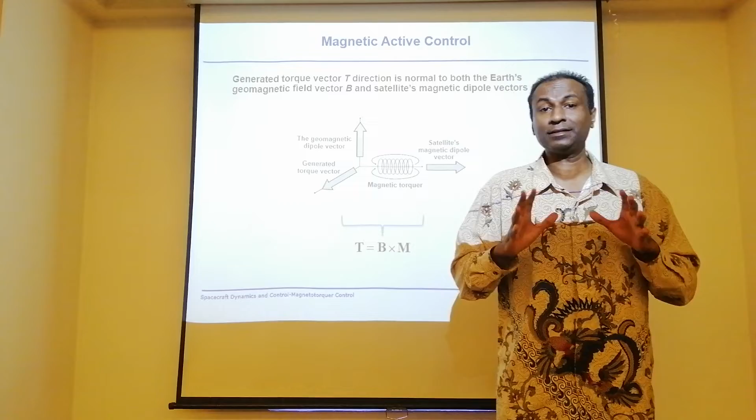So first of course is aerodynamics. Second is gravity gradient. Then you have the Earth magnetic field disturbing the satellite, and the fourth will be solar radiation, which also disturbs the satellite in terms of its attitude. So we know for a fact that the Earth magnetic field is indeed disturbing the satellite. Now let us think how we are going to use this particular field to benefit us.

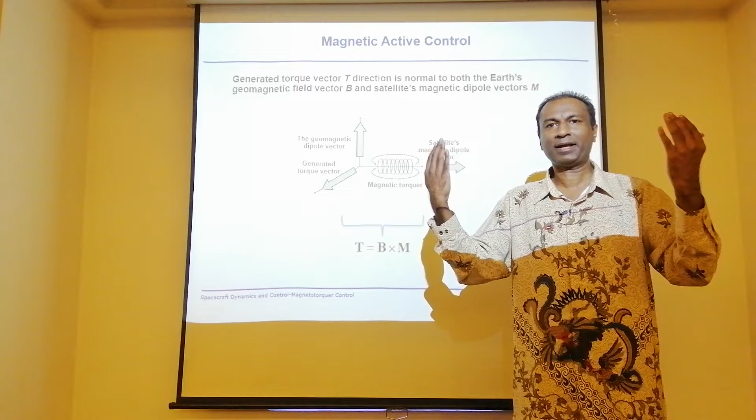If you can imagine, we know that planet Earth has a magnetic field. Assuming you bring another magnet into that field, both fields will be reacting. When both fields are reacting, obviously the smaller object might be subjected to the reaction. So you can imagine two permanent magnets we put together; there will be some forces generated between them.

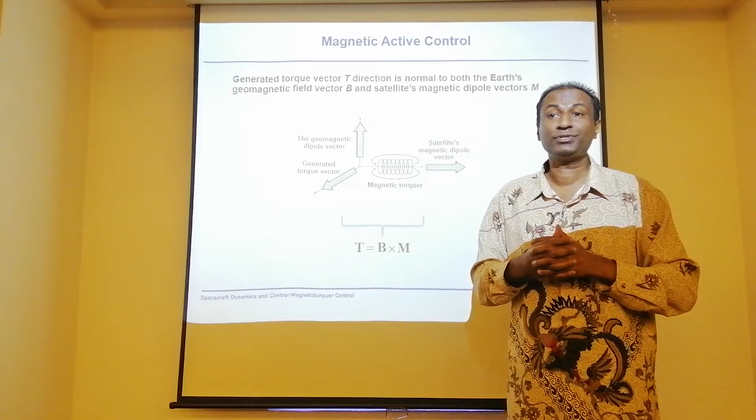So if we can cleverly understand the nature of this particular Earth magnetic field, we can start inducing a sort of electromagnet in order to react with the Earth magnetic field, such that we can induce a particular torque. So the basics are always very clear. You have 3 components involved in order for you to have an active magnetic torque.

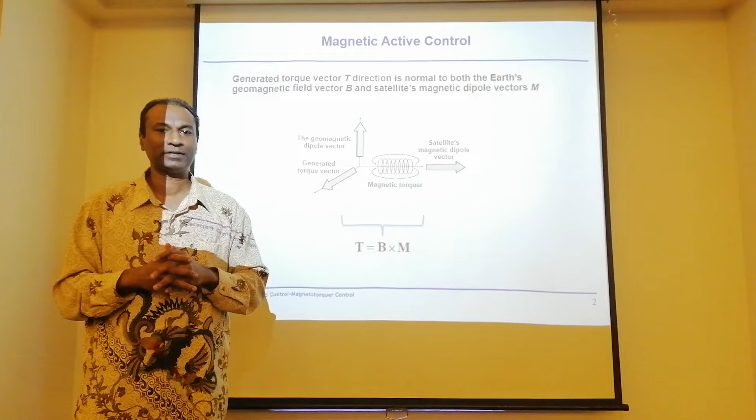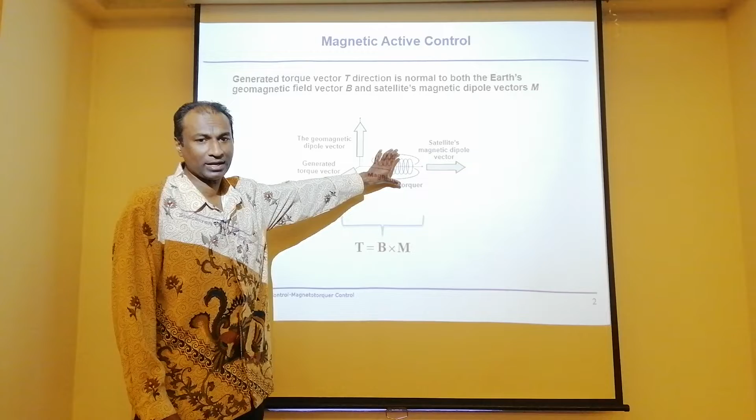Now, first, just imagine that you have a satellite, and inside this particular satellite, you have an electromagnet. You know how we make an electromagnet. When it's on, it becomes, well, a magnet. If you don't have electricity, then it just has cables inside, so to say.

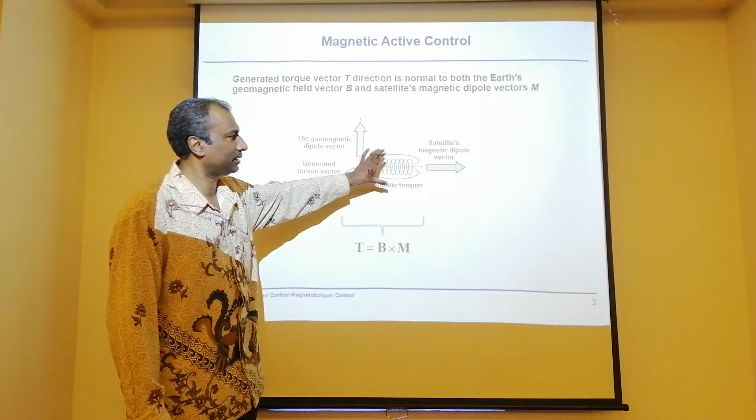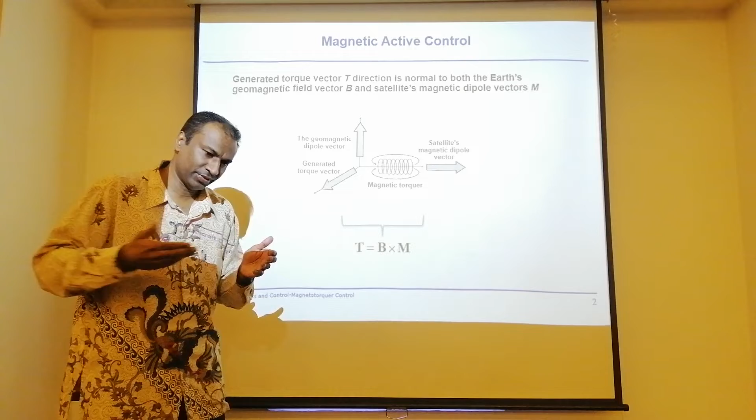Assume that I'm going to inject some amount of electricity into a coil. Automatically, my magnetic dipole vector will be there in this particular rigid body, which is the satellite. So you assume that in a rigid body, in a satellite, I inject electricity, then I will have an electromagnet.

Now, if you look at the design of magnetorquers, it also comes with both. That means there's a design whereby you have a permanent magnet together with the coils. So you have a biased magnetic field, and then on top of it you add, with respect to the current that you inject, a bit more magnetic strength.

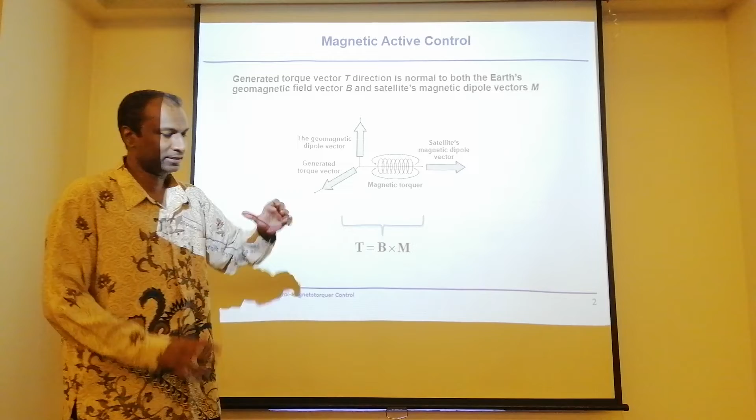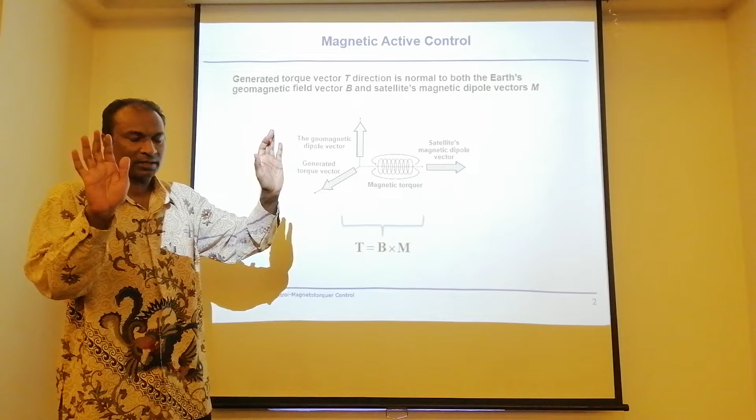So having that, you are creating a magnetic dipole in that satellite. Now, this magnetic dipole is going to react with the geomagnetic dipole vector for sure. So you have two fields already. So technically, when you have these two fields, you are actually going to generate a torque. That's the fundamental. So if you look at the amount of torque generated within this body, assume this is a satellite, assume this is planet Earth, the amount of torque generated because of these two magnetic fields

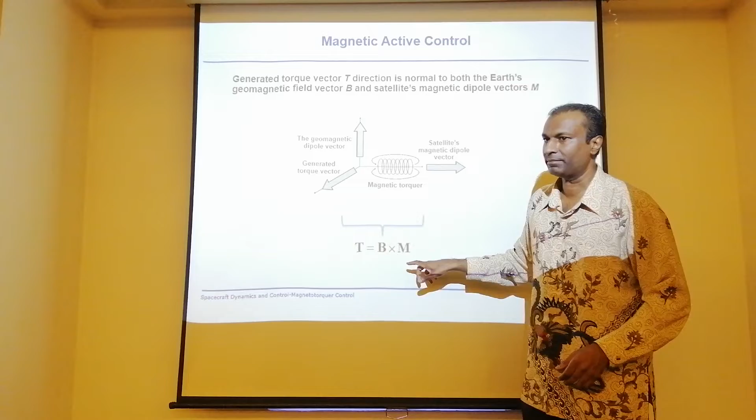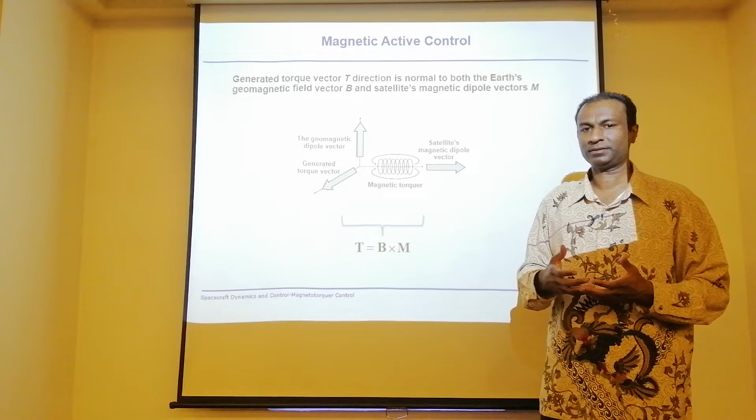is basically nothing but B cross M. And my B is basically my geomagnetic field vector, B, and my M would be my satellite magnetic dipole, which has been generated because of that electromagnet. So you can always use a right-hand rule. So you have the dipole, then you have the torque generated here. So attention, this is actually a vector. It's a cross product, this is the vector.

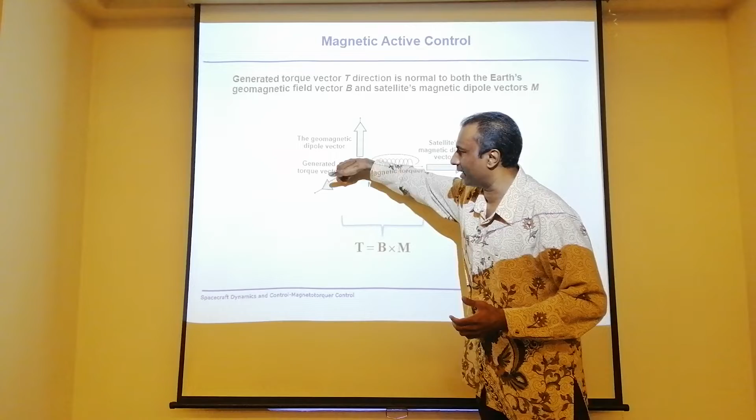So it's a vector direction, but the actual motion of this particular vector is this way. That means it's creating a rotation, but this is just a vector. Okay, so you know the satellite will be actually turned or rotated. The rotational motion happens in this direction along this particular axis. So this is a positive direction of this particular vector, I mean the torque vector.

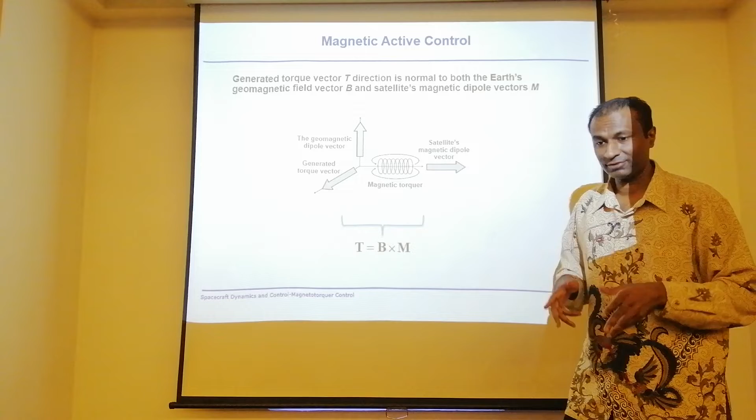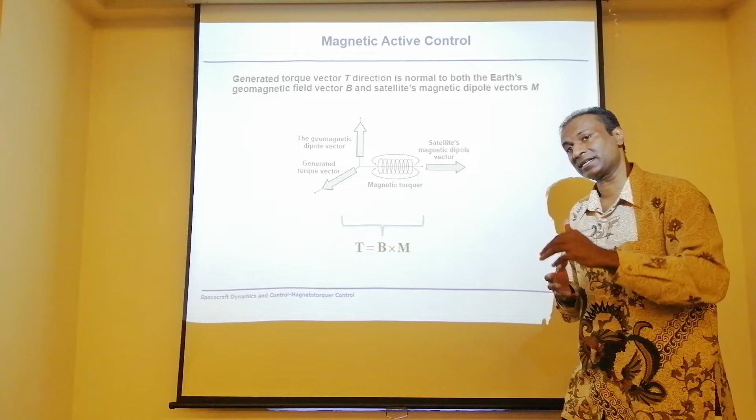Okay, so basically, in order for me to have a torque, I need a permanent magnet or an electromagnet within my satellite. When I fly a satellite, it's going to react with the Earth magnetic field, and therefore I can actually end up inducing a torque. And this torque, if I can cleverly do that, I can actually reduce the disturbance that we have always talked about. We can in fact nullify those kinds of disturbance. But again, let us see later how effective that is.

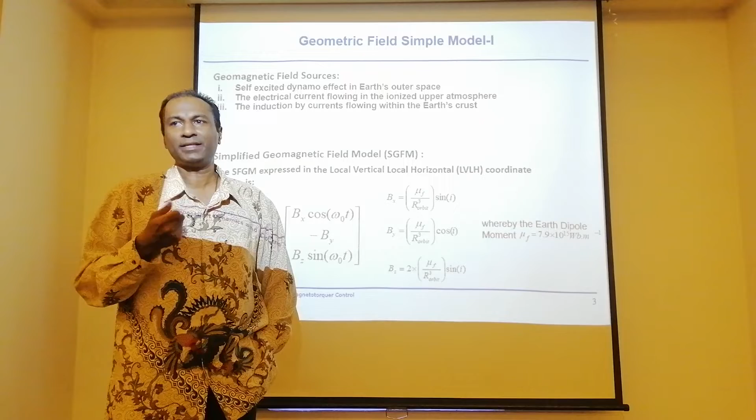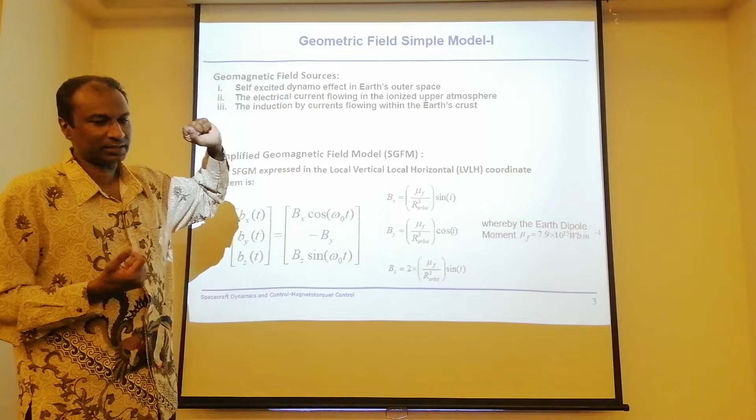Now, in order for us to precisely control the satellite, we must know the source of your geomagnetic field. Now, for the satellite itself, it's not a problem because of the magnetorquers that we can design, and we know what is the performance of this particular device. But then we also must know what is the magnet outside of the satellite, which is the Earth magnetic field. So therefore, first of all, there are basically two models. I'm going to introduce to you the simple model.

The estimation of the external disturbances. One of the external disturbances was basically the magnetic disturbance of the planet Earth, right? That is being calculated using a simple model. So again, I re-invoke the simple model. This formulation you have seen before in order for you to calculate your external attitude disturbance for the particular satellite. And basically you have X, Y, Z.

Now, if you look at it, the geomagnetic field is basically like a dynamo effect in Earth. I think this is basic physics that we have learned, how planet Earth has its own field. Current flows, it also ionizes the upper atmosphere. Then basically the induction, but the current is actually flowing within the Earth crust. This is very basically how the whole field is created.

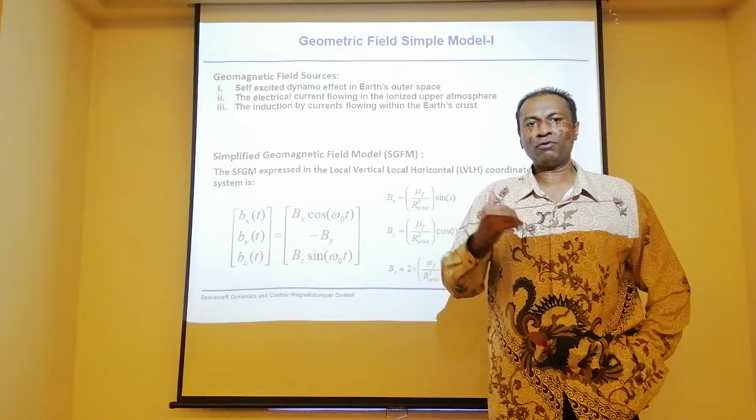Now, more importantly, please do understand that we have been using the simplified model for your estimation of external disturbance torque. And we are going to use the same simplified model to estimate the actual magnetic fields along your three axes, that means X, Y, Z. So this is basically with respect to the local horizontal system that you have. All right, now, talking about that simplified model, you may want a bit more precise model.

Remember, if we start measuring the magnetic field precisely, we can also find the attitude of the satellite. That means we can actually navigate using it. Not only are we using it to control; first, what we are trying to do is use it as another magnet, and use our magnet within the spacecraft to control it, because both will react and produce torque.

But if we measure the actual magnetic field of the planet Earth, and we know exactly the strength at any altitude, any distance, then we should be able to tell you exactly where you are in terms of your attitude. So in a nutshell, please do understand, this Earth magnetic field does three things to the satellite. It can be a disturbance. In fact, it is a disturbance for low Earth orbit satellites.

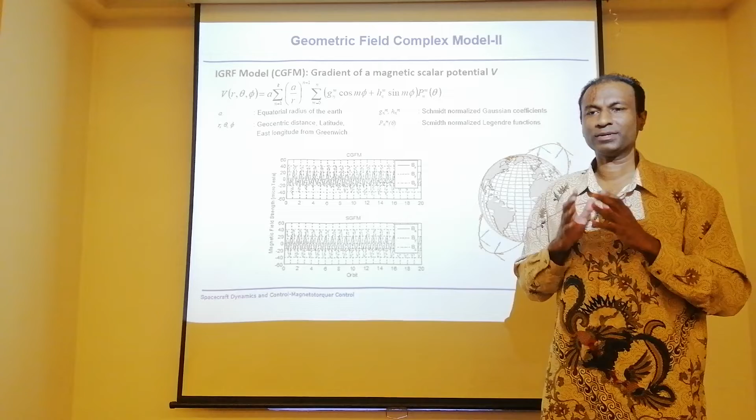In order for you to do attitude determination, you can't use a simple model. You must have a complex model to do the estimation. So there are two models actually. Typically we use the IGRF model, International Geomagnetic Reference Field, the first one. The second one is the Complex Geomagnetic Field Model. There are two models, but they are quite similar.

What this model says is a huge formulation. It looks very simple, but there are so many other processes that you need to go through. The gradient of the magnetic scalar potential V is defined by these functions. So you have a Schmidt function with the Gaussian coefficients. You have the Schmidt normalized Legendre function, and with respect to the actual altitude, in fact radius, from one place to another place.

That is the difference compared to your simplified model. The simplified model gives you an average. That's a simplified model. But a complex model will give you differences at practically every altitude. The differences might not be so huge, but they are very important when you do attitude estimation, in fact, attitude determination.

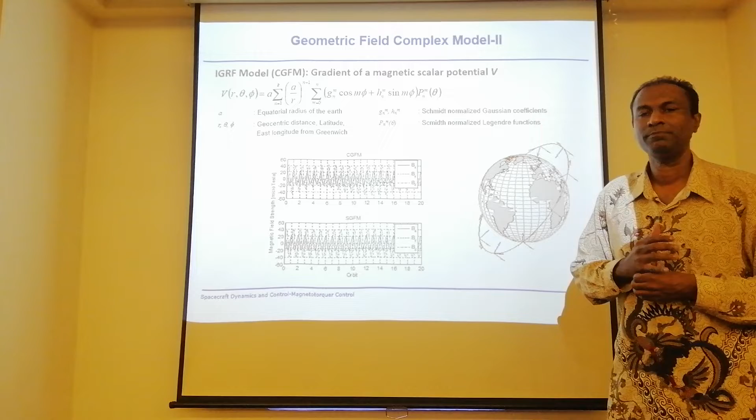So from now onwards, you know that two models are there. Since we are going to do attitude control, we can pick the simplified model to do the attitude control. The first one is B-dot magnetic control. B-dot magnetic control is one of the simplest ways that you can control the satellite, with the use of electricity, in fact, your current.

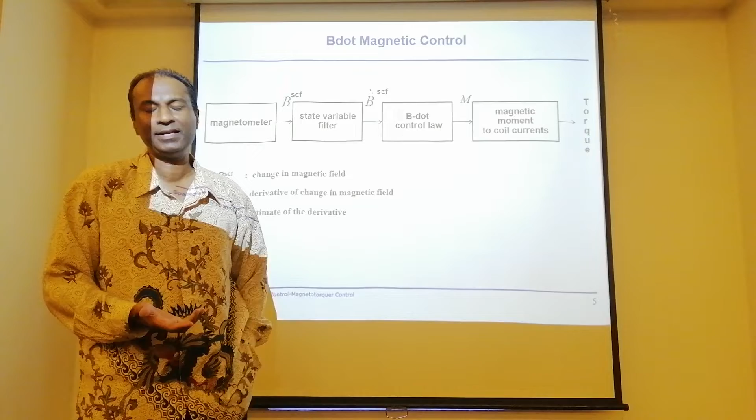What it does is that you switch on the magnetorquers and leave them on, and they keep producing torque, hoping that you can reduce the attitude error in coming orbits. It goes on until you have the error minimized as much as possible. Sometimes it doesn't go to zero, because external disturbances are still disturbing you constantly. So you will never hit a zero point with B-dot pointing.

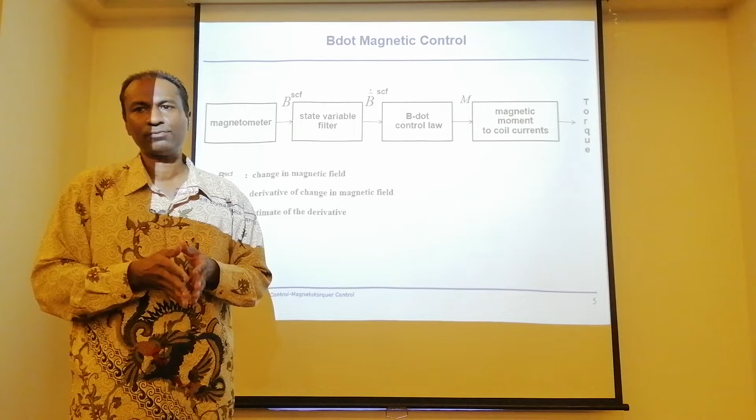Why is it called B-dot pointing? Because you are trying to find the derivative, or rather the difference between the magnetic field at time 0 and time 1. So the derivative of the magnetic field, that means the evolution of the magnetic field. What it does is this.

The simple process. Magnetometers, which I think you have done in your satellite lab, can measure the strength of the magnetic field. Once you can measure it, you know the change in the field. It's very simple. So two different devices. Magnetometers measure. Magnetorquers are basically nothing but an electromagnet, or a magnet plus an electromagnet.

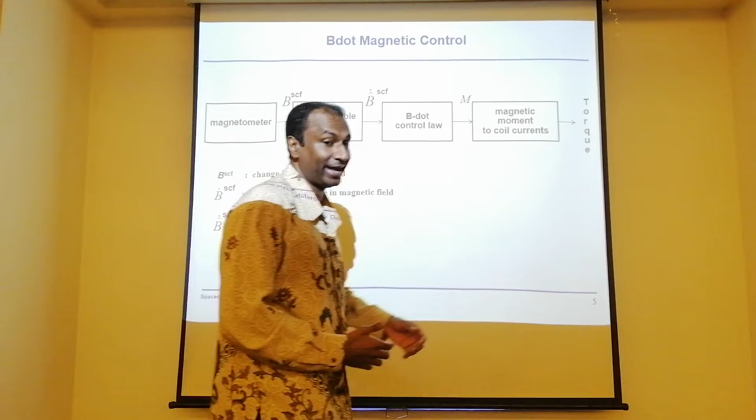Then you have a state variable filter. This is a bit complex, but why do we need this filter? Filter means it tells you exactly what the variation is, and after measuring, you need to compare with your previous measurement, so we say you're doing a filtering process. In fact, you're doing an estimation process in order to determine the derivative, or change, in the magnetic field.

So there's a process for you to do, because you have few readings. Remember when you switch on the magnetometers, let's say your orbit is about 90 minutes and you have readings for 90 minutes, you've got to keep on updating. So there is a huge amount of readings. We are just talking about only one axis here as an example, but remember you have 3 axes.

So with magnetometers, let's say you have all 3 axes, so you have 3 different readings, and every second, let's say, there is a change. When there is a change every second, you will have a huge amount of data within about 90 minutes. Therefore, you've got to keep on having a filtration process. What is a filter? Estimation. You have a process, you have an algorithm.

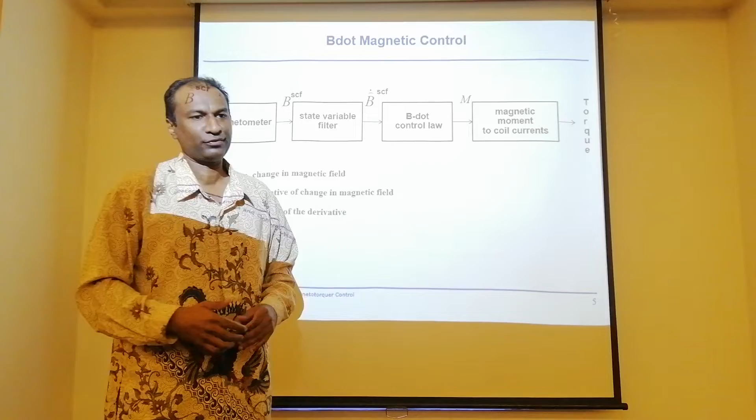But we won't cover this much because this is already in advanced courses. Filter design, for example, people talk about the Kalman filter, unscented Kalman filter, etc. All those are in advanced courses, in fact, a master's program or PhD program. But here, this is just an estimator which estimates the actual change. Once the change is detected here, practically the estimation will be given.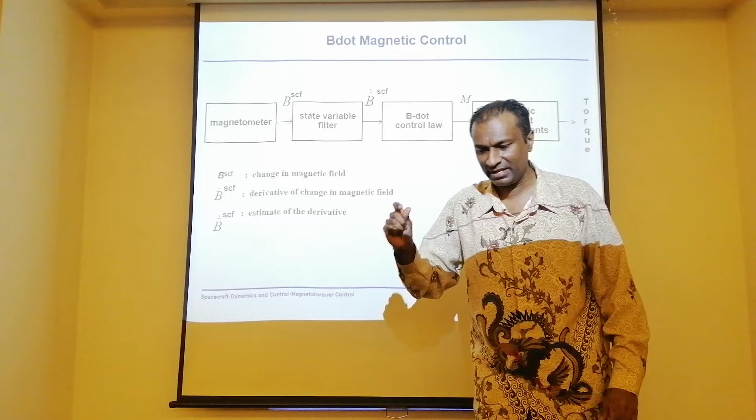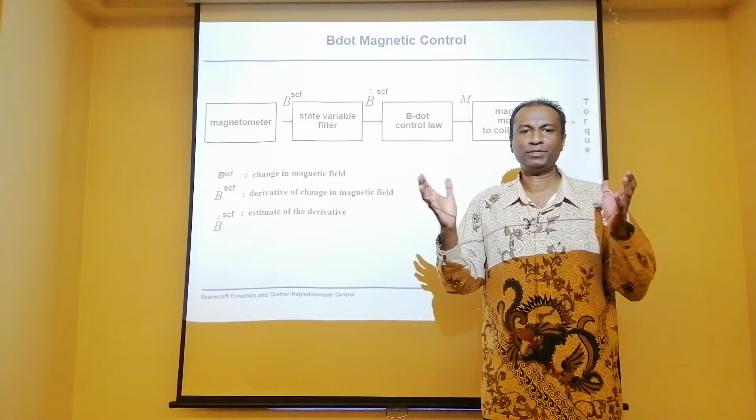The real attitude means what? The best is that roll is 0, yaw is 0, and pitch is also 0. All those have to be 0 attitude. Then you are perfect, that means perfect pointing. But never. So what exactly will you command? The B dot. Commanding the B dot means you will command the actual differences of the field. That is the simple reason why it is called B dot pointing. And it goes on just like that.

So the command law is done, B dot is given, then the coil reads that: I need to produce this much of a B field, a dipole. It commands, meaning electricity comes and energizes the magnetorquer, then you produce the dipole. Therefore, torque will be produced. Remember, a magnetic dipole from the satellite with the external field produces a torque on the body.

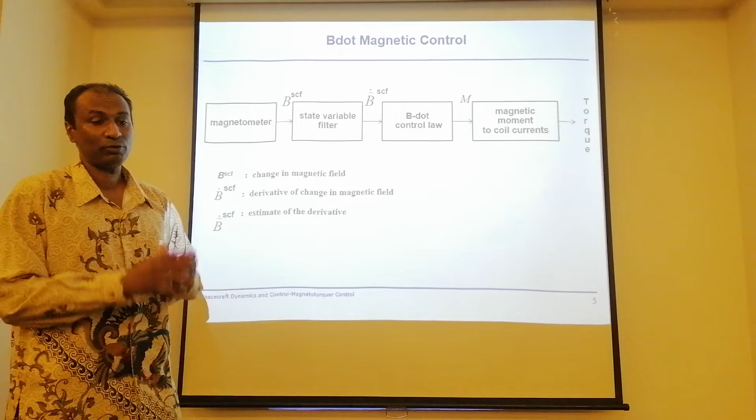This goes on. If you look at it, it's almost like an open loop system. The command is just based on whatever you measure indirectly, and then you start commanding. You can assume it's an open loop command, or rather an open loop system, and you keep on commanding, hoping you can reduce the B dot. When the B dot is 0, you don't need any magnetic dipole from the satellite. That means you already have perfect pointing. But it is very difficult to achieve that. That is the reason you keep on commanding.

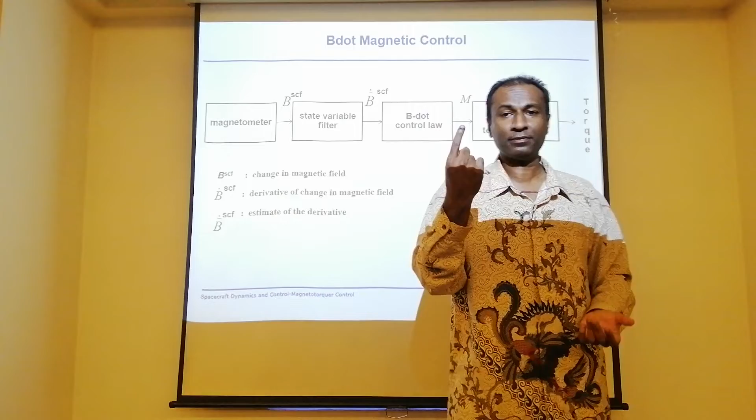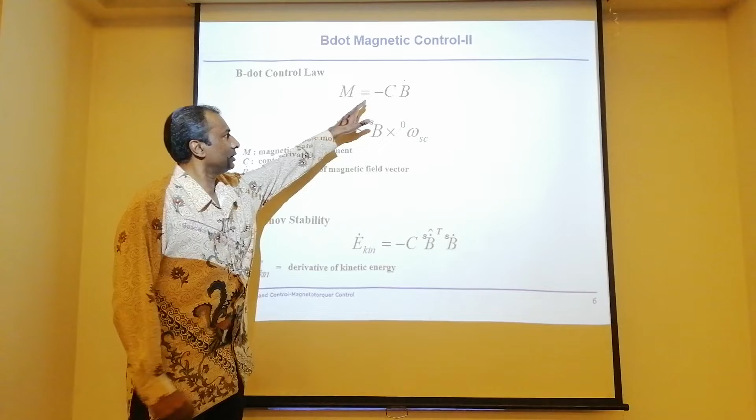So if you have one magnetometer along one axis, you can use this algorithm to command that particular axis. If you have 3 axes, you can have 3 B dot commands commanding the whole system. Moving on. The command is simple, the B dot control command. This is what is given to you, and this is the actual magnetic moment that you need to have. You have to have a C.

C is basically the control gain, and we should be able to start tuning this control gain based on the exact B field that you have. This is a bit of analysis that we need to do so that we can choose the right gain. So it's a very simple, straightforward commanding process. It's not complicated at all. B dot pointing, or B dot commanding, is one of those very basic, very simple ways to control the satellite.

Therefore, if you look at the exact command, this is why B dot happens, because there is a change in the spacecraft. That means there's a change in the exact motion of the spacecraft. When this is 0, you don't need any B dot. But when you have omega, the angular rotation of all these axes, that means there is an attitude error, then you will end up having a B dot. So once it's estimated, you inject it into the command, then you have the control system, which is producing the torque.

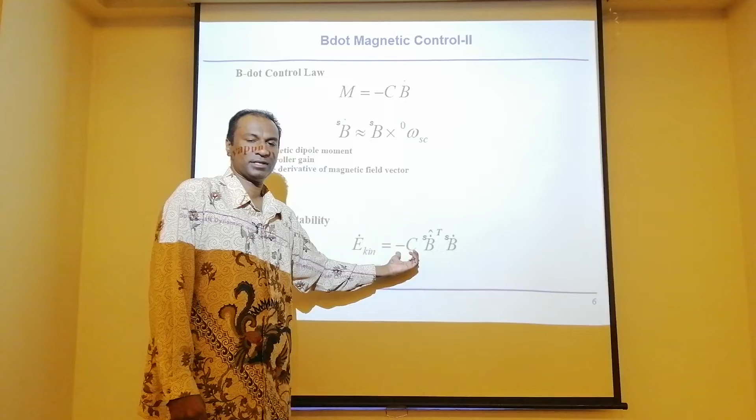Now, in order for us to calculate the control gain, the constant, it's a very simple way. We have these two values already, estimate and then B dot, and this is C basically that I've said. There should not be any derivatives in the kinetic energy. When there are no derivatives in the kinetic energy, the kinetic energy derivative is almost 0. When it goes to 0, practically it says that there is no change in the motion of the spacecraft.

So when you do this analysis, you will start adjusting this control gain in order to get a very stable condition. Almost 0, we can't say exactly 0, almost 0 when there is no change. That means your desire is that there won't be any kinetic energy build-up. It should be constant. When it is constant, practically your motion is very constant.

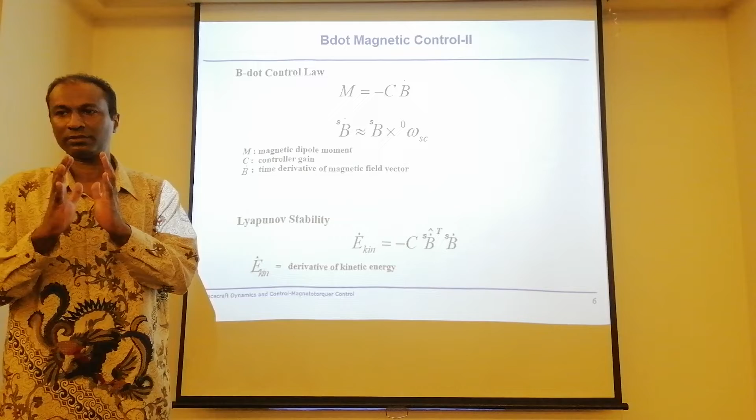So it's a simple stability, Lyapunov stability. In control engineering, you might have been exposed to root locus, etc., and Bode analysis that you have done. But another way, Lyapunov, is also quite commonly done.

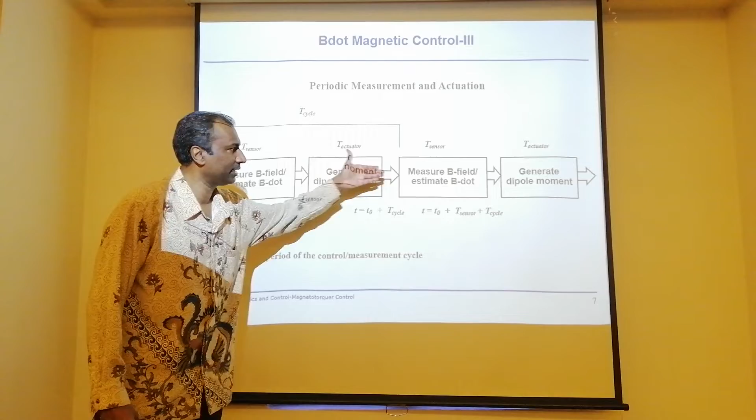Alright, now if you look at B dot magnetic control, it is just like what I've explained just now. It is a constant pointing, a constant torquing, so to say. So what exactly happens? This is considered one cycle. I sense, I generate dipole, I have torque. I sense, I have B dot, then I can have the control torque, or generate dipole, then I can have the control. So this is measure, control, measure, control, measure, control.

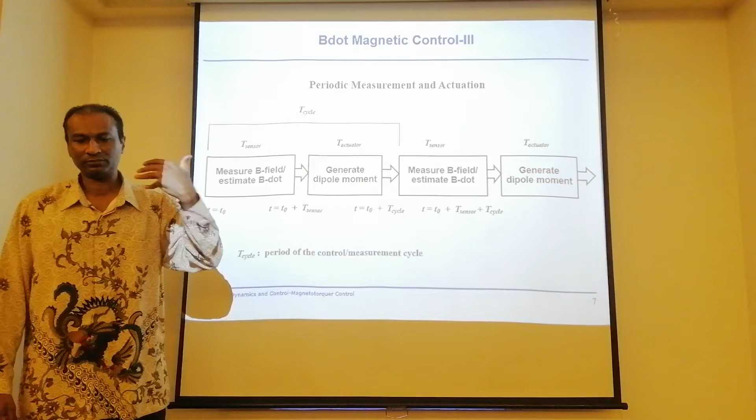You don't see a closed loop here. When you do a control system, we know that there is a closed loop, but here it is considered an open loop system, open loop command: measure, command, measure, torquing. That is considered one cycle. The total cycle consists of the sensing time and the torquing time, the torque that you induce to the spacecraft. And it goes on and on.

If you look at actual missions, let's say the mission is for 2 years, it will keep on going for 2 years or more. There is no time it is going to be zero and stop. If this process stops, that means what? Practically your satellite is perfectly pointing, and that is impossible with this kind of process. All right.

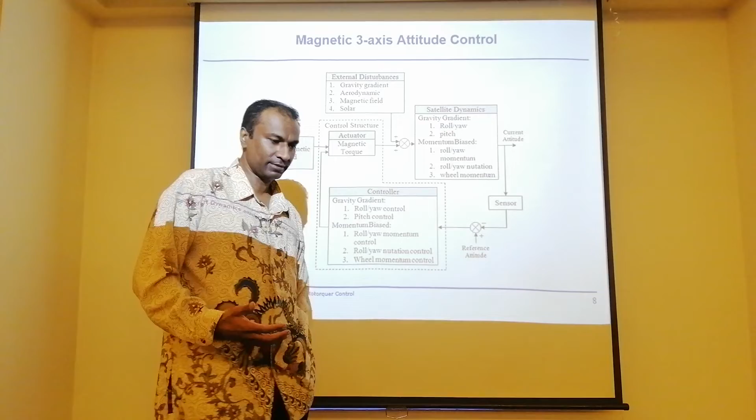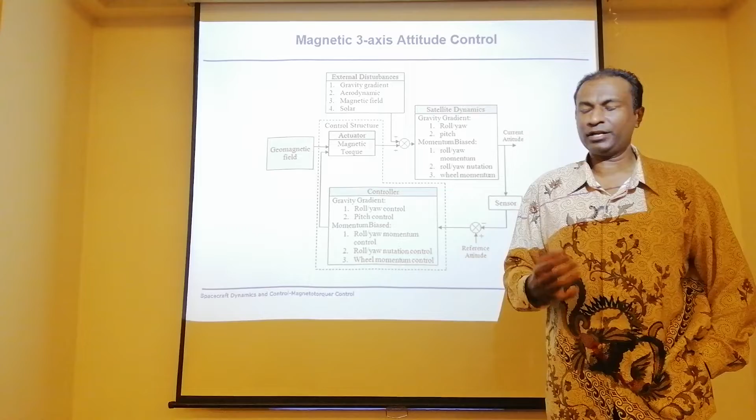Now, 3 axis. We don't see much analysis in terms of the equation of motion that we have developed. In chapter 4, we have seen very clearly that the equation of motion for spacecraft dynamics, the Euler equation, the linearized Euler equation, is very important to look into the stability of a spacecraft. With B dot, we don't deal with that equation, which means the precision of B dot pointing is not very accurate. Because in a control system, we have to define the plant carefully if you really want good control.

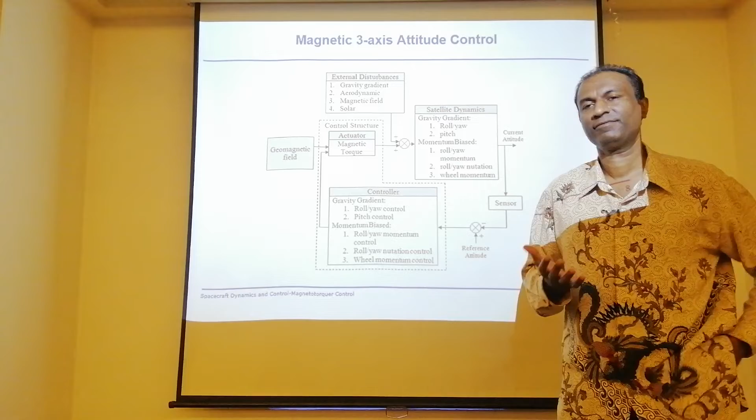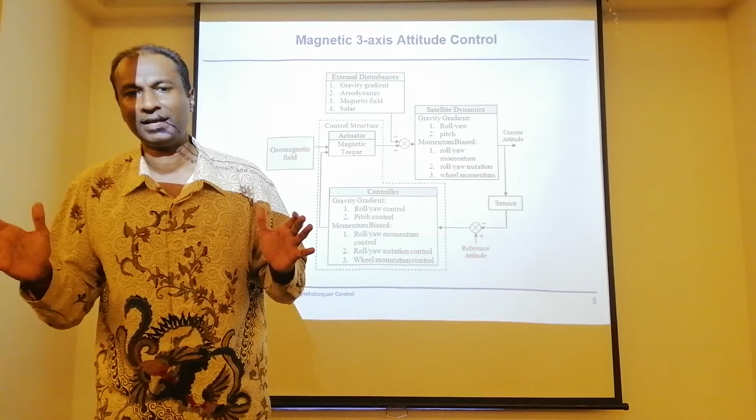So in our case, the plant means what? The actual dynamics of the satellite. We have already developed that. In chapter 4, we have seen the Euler equation. We have seen the RPY equation, roll, pitch, and yaw equations, how the components are there. We already have that dynamics. It's a second order system.

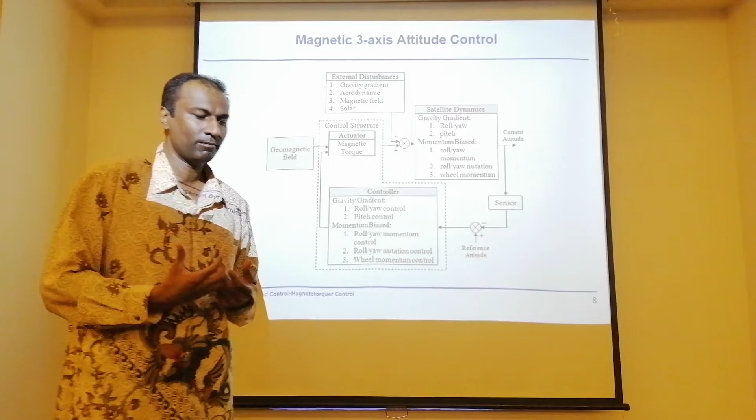So what we want to do now is, can I use these magnetic torques combined with those equations and start doing more precise control? Yes, I can. When I look at a 3-axis attitude control system, I have these options. Now, again, let's see.

Geomagnetic field. So geomagnetic field, that is very simple. We are bound to Earth's magnetic field. We must have that. There's an input. We have a control structure, actuator as magnetic torquers. Then the 4 external disturbances that you have learned in chapter 4 come into play here. Although you need the magnetic field to help you to control, the magnetic field is also at the same time disturbing you. Don't forget that.

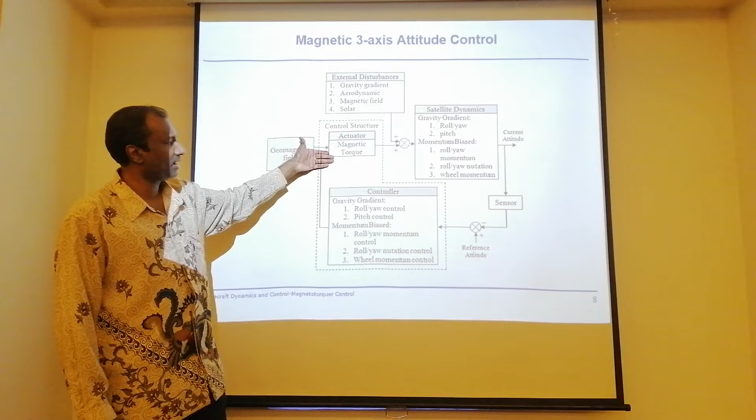Then we have another control. For example, we have learned also gravity gradient. We can use that to also dampen the actual attitude errors. So we know it can actually help us with the roll and yaw control, and then pitch can be also dampened in that sense. But again, it is not as good as active control always.

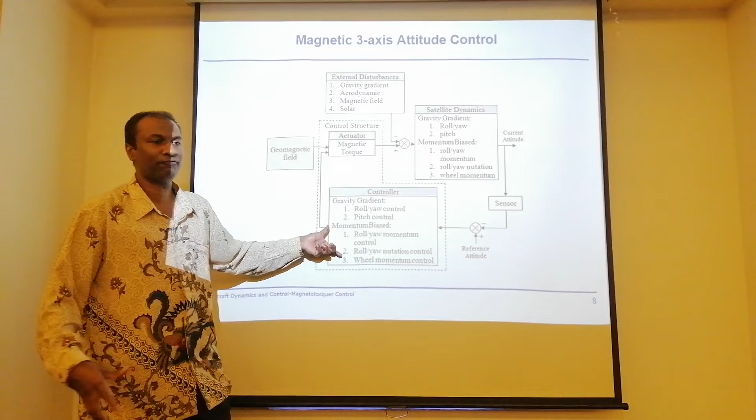Attention to be given to momentum bias. Momentum bias we will cover in chapter 6. It's another way to control the satellite. Obviously, a bit more precise compared to fully magnetic control. So likewise, you have satellite dynamics, you have a gravity gradient, you have a momentum bias. In fact, this we are going to cover in coming chapter 6.

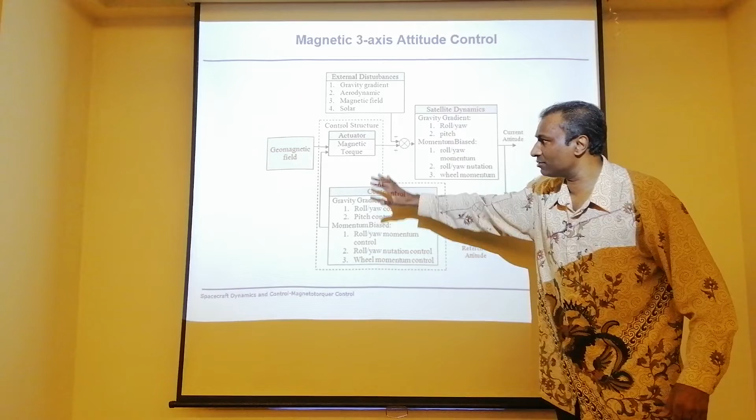So then you have a sensor sensing all those attitudes. You have a reference attitude. What is our reference attitude? Our reference attitude will be always 0. Hopefully we can get 0 roll, 0 pitch, 0 yaw. That means perfect pointing. This can be a very good scheme of control options that we have for low cost options. But we will actually define this. So based on that, this is what we have.

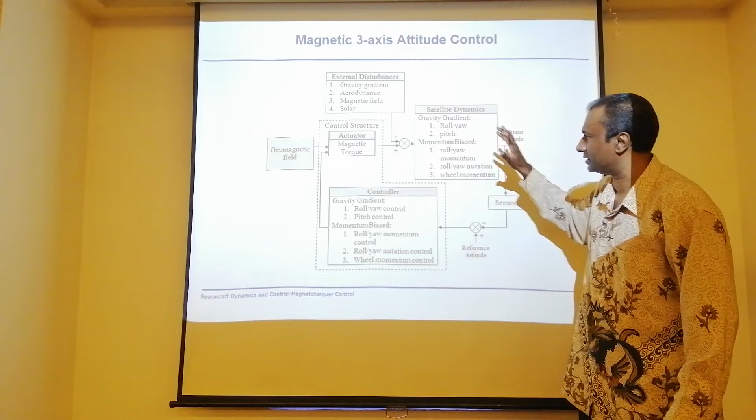Let us see how we can do a 3-axis attitude control based on the knowledge that we have already, which is the B dot using magnetorquers. Now for a 3-axis control, same approach. Magnetic field, and then basically your dipole: the dipole of Earth's magnetic field and the dipole of the satellite's magnetic field that you generate. So cross product. If I have one axis, I need to treat only one equation. But if I have 3 axes, I need to have 3 components. So I have Tx, Ty, and Tz.

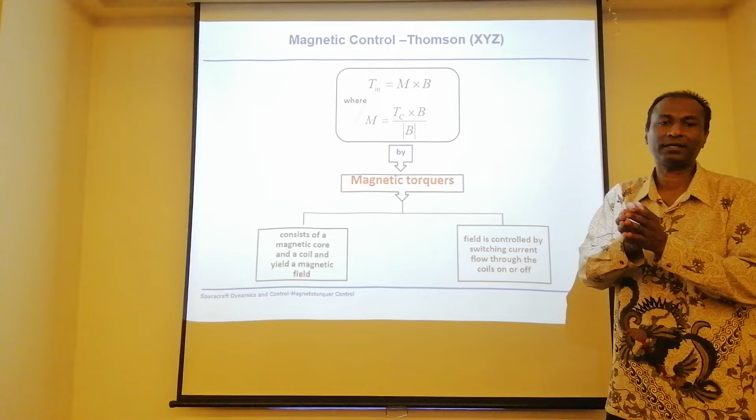So now, more importantly, let's see that exact curve. This consists of a magnetic core and coil and the magnetic field. Even if you have 1, 2, or 3 magnetorquers, same process. It is basically an electromagnet. Its job is basically to produce a magnetic field in the spacecraft. When we start controlling it, by having the B dot, we know how much current we should be injecting inside, so that the electromagnet can produce the needed strength of magnetic field to react with the Earth's magnetic field.

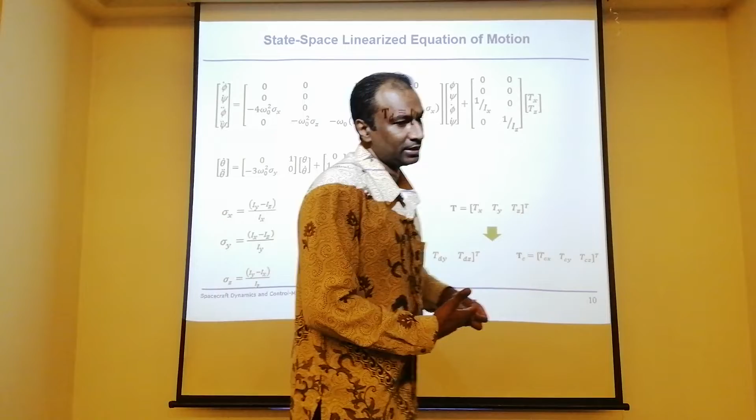Now this is a simplified version. We are not going to discuss much about the derivations of this. What I've given you is a very simplified motion. The first 2 motions are basically roll and yaw motions. By now, I don't need to write roll, yaw, pitch. By looking at the symbols, you already know what axes we are talking about, because we have defined that already. So roll motions are there. The angular rate of the roll and angular acceleration of the roll is also specified here. It is in the state-space form.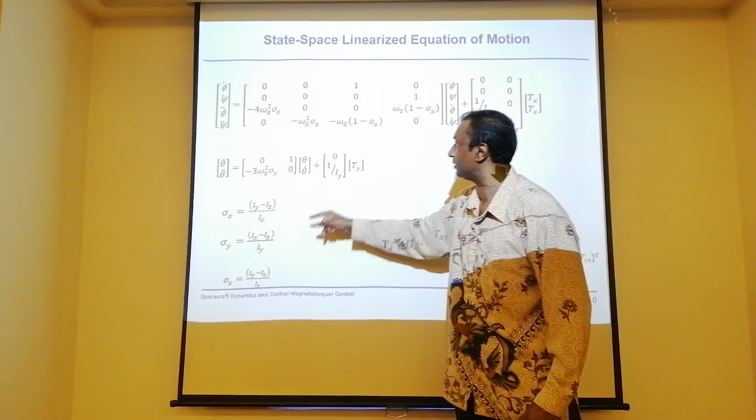Now don't forget, this has been developed using the Euler equations of motion. You have a coupled roll and yaw motion. You have decoupled the pitch motion. So you have torque in roll, torque in yaw, torque in pitch, RPY. And I've given you this sigma x, sigma y, sigma z. Depending on the exact inertia, the value goes in here for you to get the actual command.

Now, remember this. The actual torque that you see consists of 2 components. One is the disturbance torque and another one is the control torque. Here, this one.

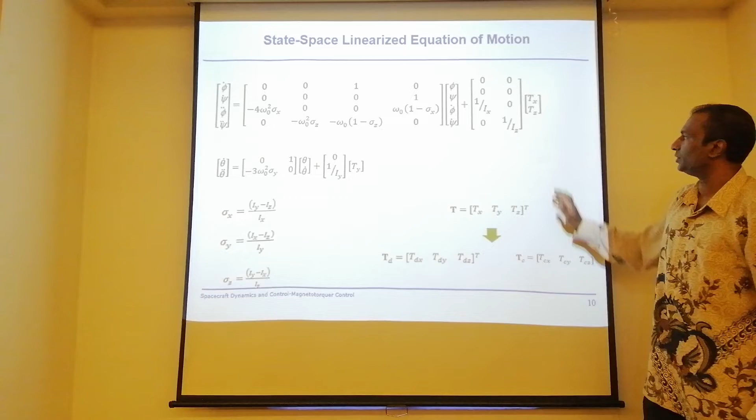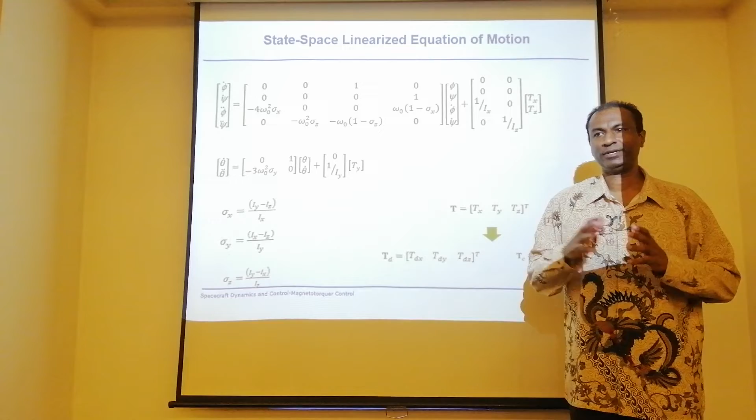Always remember, if you look at our equation of motion, on our right side, there's always a torque. And the torque is a global torque. It consists of 2 components, control and the disturbance. If both are equal, meaning both cancel each other, you will have 0, right? When the net values are 0, technically you have a perfect pointing. You will have a perfect pointing.

Yeah, you don't have to worry much about controlling the satellite anymore. So remember this. All these always have two components here. Go on. Now, if I expand that, because I have it already in the state space, it gives you a very beautiful equation on my torque along roll, torque along pitch, torque along yaw. Technically, all these values can be found by estimation.

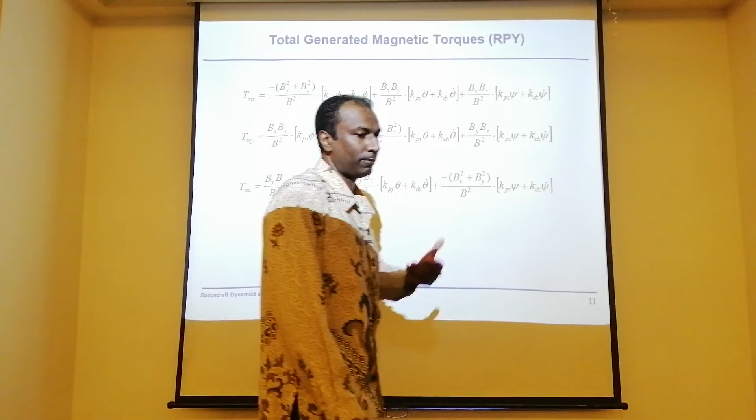Now, attention needs to be given to this value Kp, Kd, Kp, Kd, Kp, Kd. Okay? Kp stands for proportional controller and Kd is derivative controller. As we have learned in control engineering, a PD type controller has been used here as an example for you. Alright? Again, don't worry much about the equation. You can plug this into MATLAB, then you can calculate this easily. That's a very, very straightforward equation.

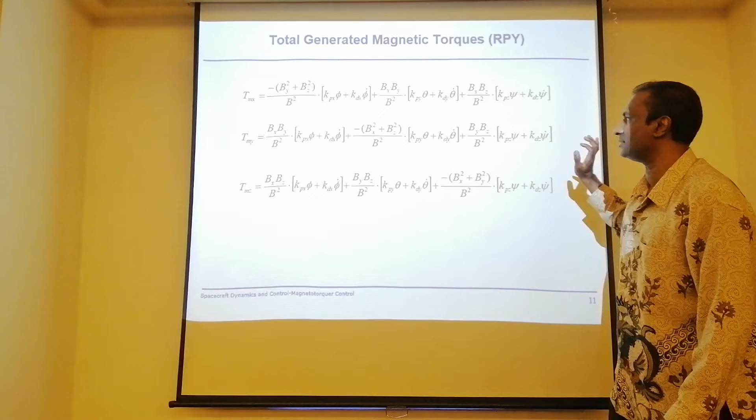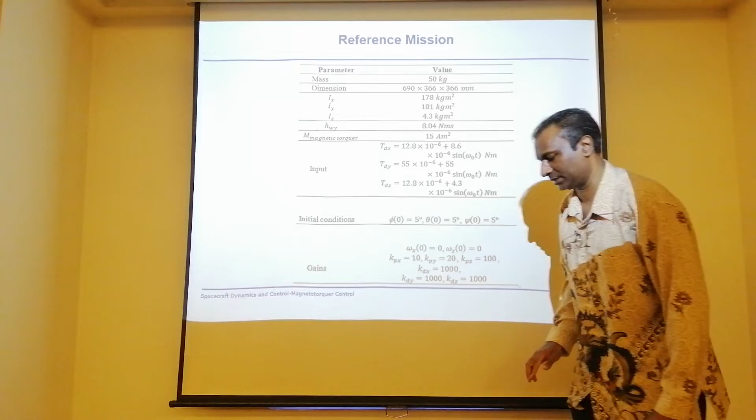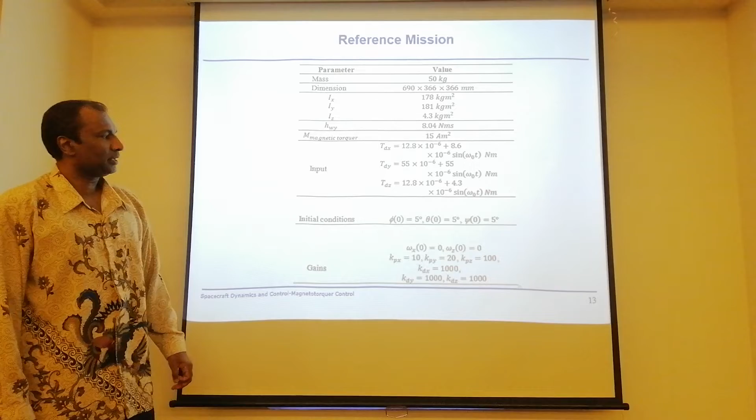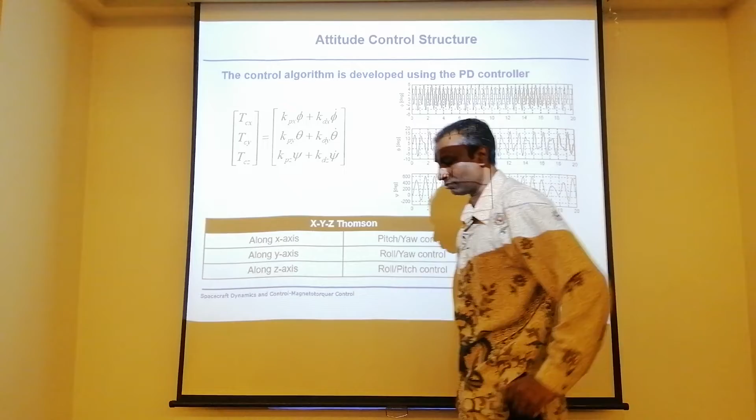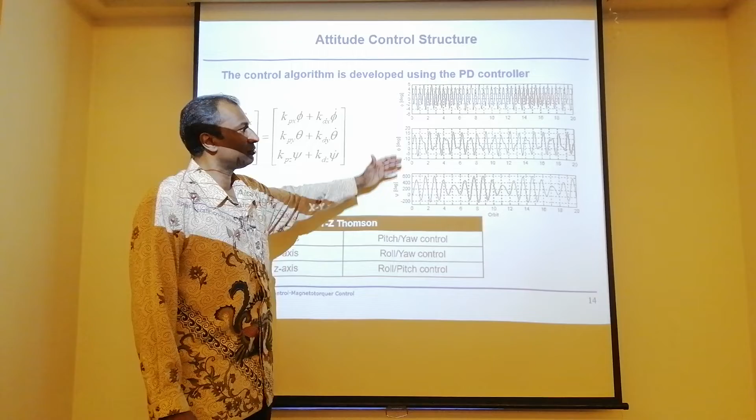What I'm saying is that sometimes it looks so simple. I should be getting all these good results, you know, because I'm having 3-axis active control. I should be having a good result. No, it's not necessary. Sometimes you won't, based on that particular satellite. If you look at it, we have not a very good pointing accuracy. You see 6 degrees, and then you look at yaw, it is almost uncontrollable. That means the yaw axis is rotating already.

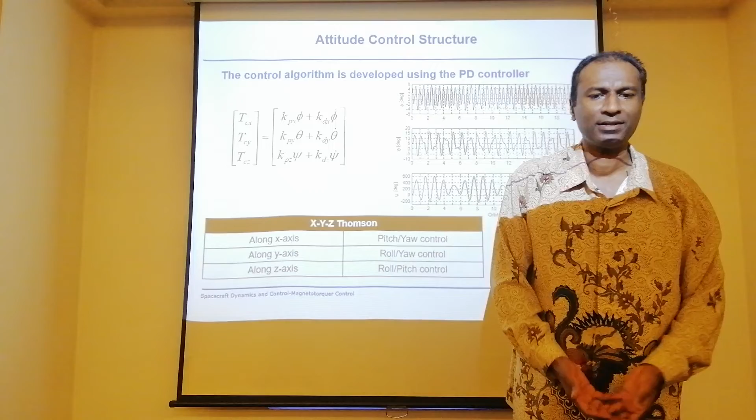But still, as I've said before, you can allow the yaw to rotate because you are still pointing towards planet Earth. But the amount of rotation is quite high if you look at it. So it's rotating quite hard. So we need to address this problem. Therefore, there is always a need for us to think how we can overcome this, how we can provide the satellite with a very good control, better than what you see. How can we do this? That we will cover in chapter 6.

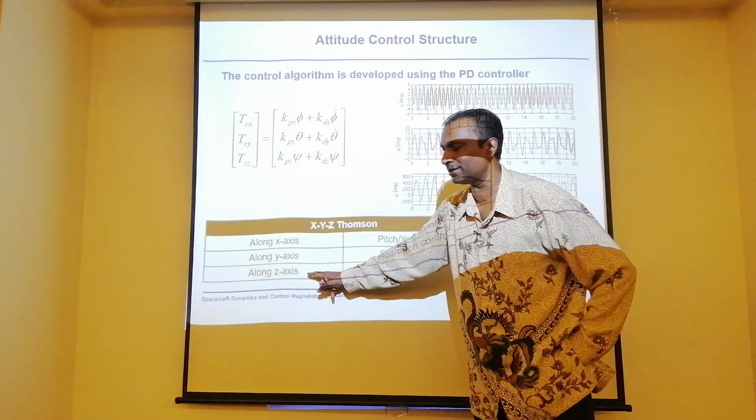Now if you look at this XYZ Thomson, this says that your magneto-torquer is along the x-axis, your magneto-torquer is along the y-axis, your magneto-torquer is along the z-axis. If you have a magneto-torquer along the x-axis, you can only control pitch and yaw, which means you cannot control roll. Okay? Magneto-torquer along y-axis. Y-axis is your pitch axis. Your pitch axis can only control roll and yaw.

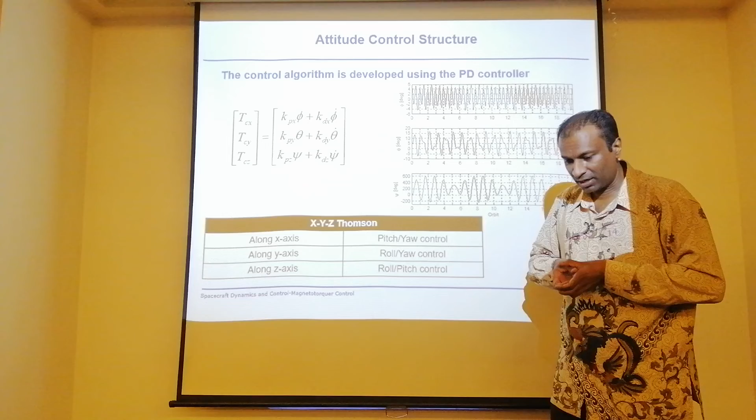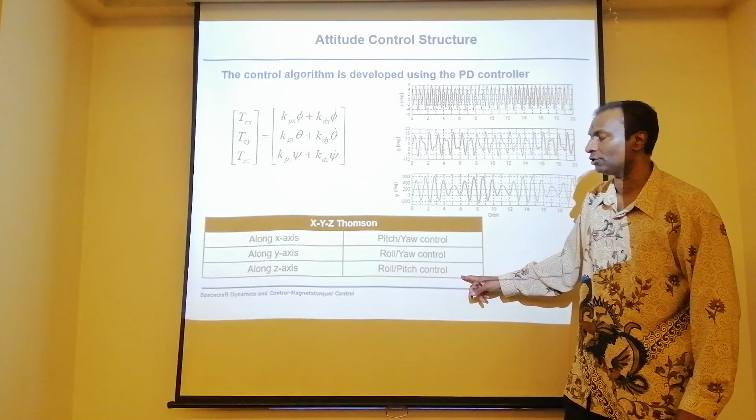Because why? It has to be perpendicular to that particular axis. That means the axis it lies along, it cannot induce any torque along that particular axis. So it is always perpendicular. Z, which is the yaw, is going to have roll and pitch control, not yaw control. Alright? Okay, go on. I think we have covered this.